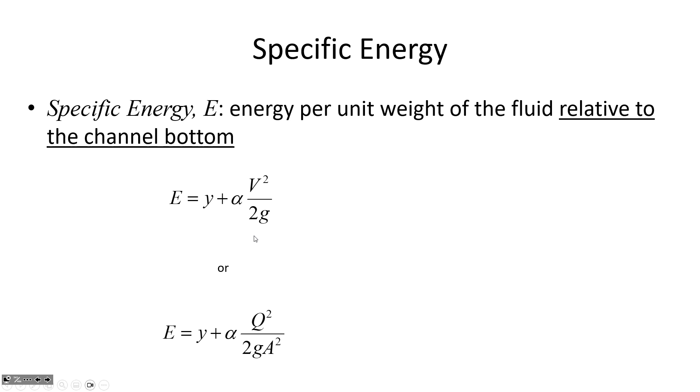But specific energy is just saying, if we measure the water right here, what's its depth and velocity head, and then in the direction of flow, we can compare how much energy is there at one location to another. If conditions are steady and uniform, then all of the head loss that's occurring as the water flows downhill is equal to the changes in elevation. We've talked about that before.

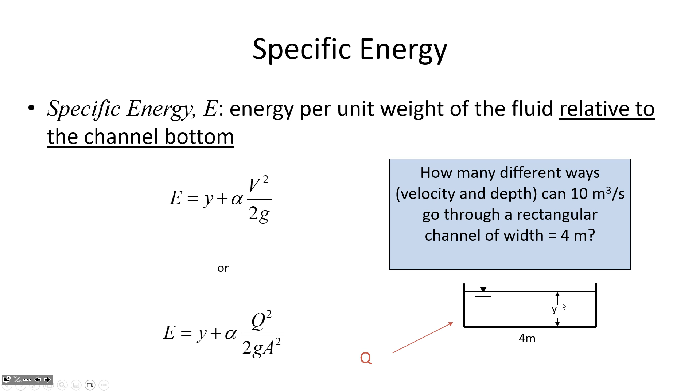How many different ways in terms of velocity and depth could 10 cubic meters per second flow through this channel, which has a bottom width of 4 meters? So there's as many different possible flow depths as there are different possible slopes. We could have, for example, a really steep slope where the velocity is really high. You know, if it's really steep, like water slide steep, then the velocity could potentially be moving at 10 meters per second.

Or if the channel is relatively shallow in slope and it's laid out on flat land, it could be that the water's just ambling along at a very slow 1 meter per second. So it would depend on the slope, but you could have any potential velocity. And remember that all of these different combinations we're going to look at have 10 cubic meters per second.

And if Q equals V times A, then area, cross-sectional area, is the flow rate divided by the velocity. So if the water is moving at a really fast velocity, then it's going to have a relatively shallow depth, because the water wouldn't need to be very deep if it's moving really fast at a high velocity to achieve 10 cubic meters per second. So we're just saying, what are the possible cross-sectional areas?

And then if this channel is 4 meters wide, in order to get a certain area, we would multiply 4 times the depth to get the area, or to get the depth, y, we would have the area divided by 4. So this is just saying, for example, if we had the 10 meter per second velocity, then you'd need a 1 square meter area to get 10 cubic meters per second. So if you just consider the units, 10 meters per second multiplied by 1 square meter is equal to 10 cubic meters per second.

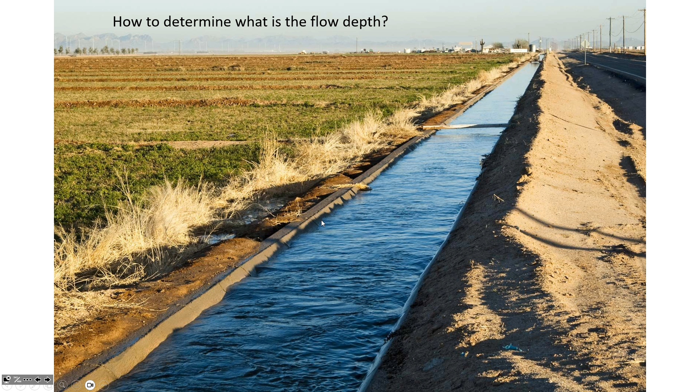And when we disturb the water, like if we put an obstacle in the channel, going back to this irrigation canal, if we just dropped a couple of sacks of cement in this channel when it wasn't flowing quite as deep. I mean, if we dropped the sacks of cement into this channel, probably it would flow over the edge. But if it had half as much flow in it, it would pool initially until it had a certain amount of energy, and then it would flow over the obstacle.

So let's consider it from another perspective. If we made a graph, we could have flow velocity on one axis and flow depth on the other. So, I mean, I guess that's a pretty interesting graph, but it's not the really interesting graph. The really interesting graph is the specific energy diagram. And you're going to have to make some of these in Excel. And they're very useful for problem solving, for diagnosing the flow regime.

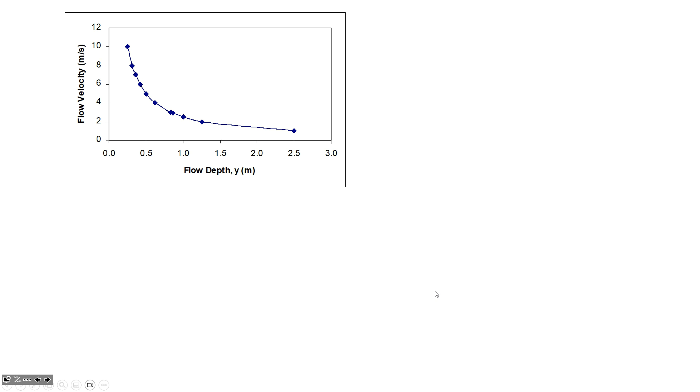Flow regime is a phrase you've heard before. On one of the homework assignments, I think you characterized the flow regime. Do you remember what you calculated? What number was it you calculated to diagnose the flow regime on that assignment? Froude number. Very good. So Froude number is one way to diagnose flow regime. These diagrams are another. So this is the ho-hum, kind of boring diagram.

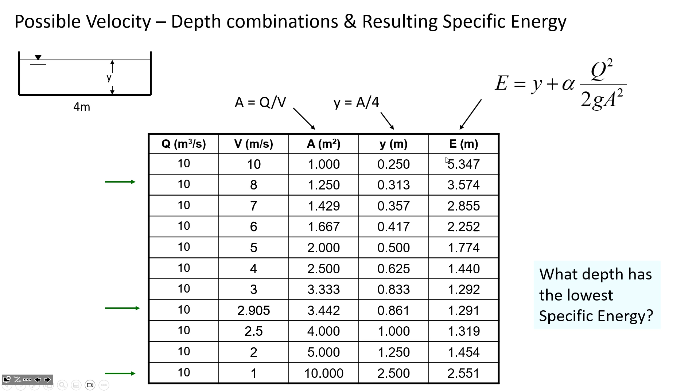But if we graph the specific energy on one axis and flow depth on the other, this is a very, very important figure. And there's a lot of questions we can answer with this figure. It looks simple, but boy, it's powerful what we can do with just graphing these details. So we'll explore over several classes all of the things that we can assess with a figure like this. But all I've done is I've taken the data from the previous slide. So I took the E data and I put that on the x-axis, and I put the depth on the y-axis.

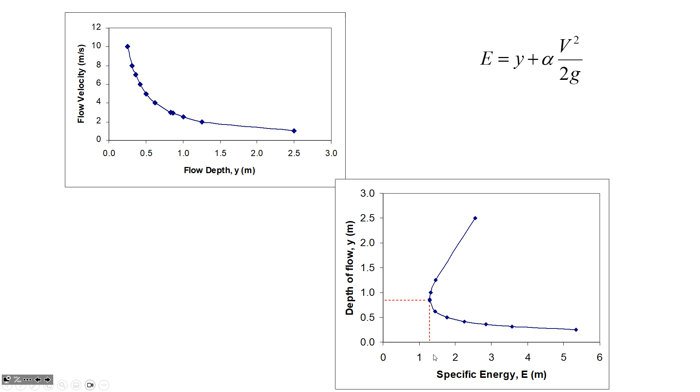So depth on the y-axis, specific energy on the horizontal axis, and then remember there was some depth that corresponds to the minimum specific energy. That's this point right here, that's furthest to the left. It's a really important point, the point of minimum specific energy. So this minimum specific energy point, if we take it over to the left axis, it gives us the critical depth. And if we take it down to the horizontal axis, it identifies the minimum specific energy required to convey this 10 cubic meters per second through a channel that's 4 meters wide. So minimum specific energy and critical depth are the first two things that we can figure out from this figure.

It's important for you to know this. In this class a lot of it is just putting numbers into equations, but there are certain times when you're going to have to really understand what's happening, and this is one of them. I've given exam questions before where I just ask people to tell me things from the figure, and it was really disappointing how few people really understood what's being displayed in this and what it means, because it's really powerful.

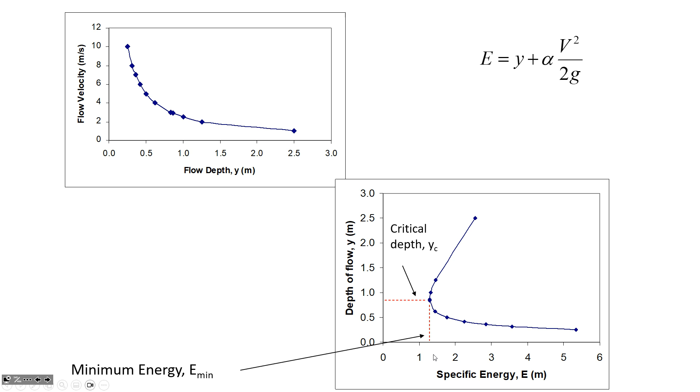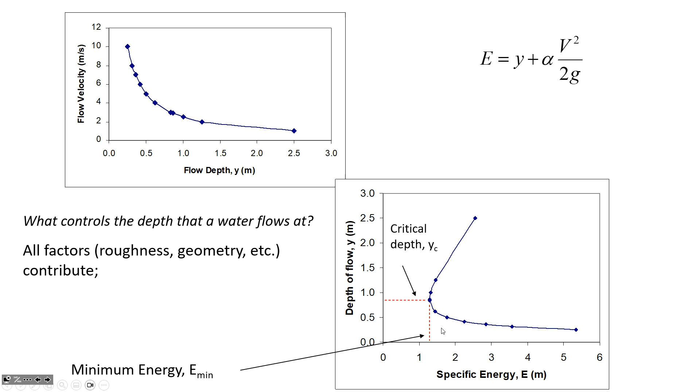So back to the idea of there being lots of different possible slopes, there are a lot of things that govern water's flow depth through a channel. Everything plays a role. The roughness of the material that's been used, the shape of the channel, meaning whether it's trapezoidal or semicircular or rectangular and so on. All of these factors contribute, but for a given cross-section, it's the slope that determines what the flow depth will be. So all these different depths of flow that we see here would correspond to some certain slope.

Now, alternate depths are something that we can diagnose from this figure. So remember, the first thing we can figure out is what's the critical depth. We can also find out from this figure if there are certain depths that seem to have the same amount of specific energy. So for example, when the water depth is 2.5, if we go over here to this figure, there is another depth down here. It looks like a depth of about 0.4 meters that has the same specific energy.

And that is significant when we're dealing with a phenomenon known as hydraulic jumps. And hydraulic jumps are seen in a lot of cases. Maybe one that's really important to us is in the spillway of a dam. There are often hydraulic jumps where water is going from supercritical flow, where it has lots of velocity and a lot of energy. It will jump to subcritical flow, and it goes through a pretty visually dramatic transition, and it'll jump up to an alternate depth that we could predict using a specific energy diagram.

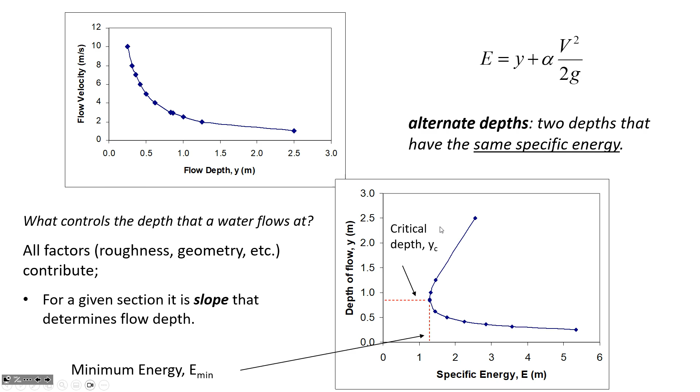So flow regime can be classified using Froude numbers, or you can classify flow regime by comparing a given depth to this diagram. So any flow depth that's less than the critical depth corresponds to supercritical flow conditions. When the flow depth is greater than the critical depth, you've got subcritical flow. So that's what this is saying. When the depth is greater than the critical, then that's subcritical conditions.

Now, maybe you'd be thinking, well, why is it called subcritical if the depth is more than the critical depth? It's because the velocity is moving slowly. If you've got deep water, it's moving slower. If you've got shallow water, it's moving faster. So when the flow depth is small, the velocity is high, and that's what makes it supercritical flow. So this is another way to diagnose the flow regime, is you compare the actual observed flow depth to the critical depth, and then you can figure it out that way.

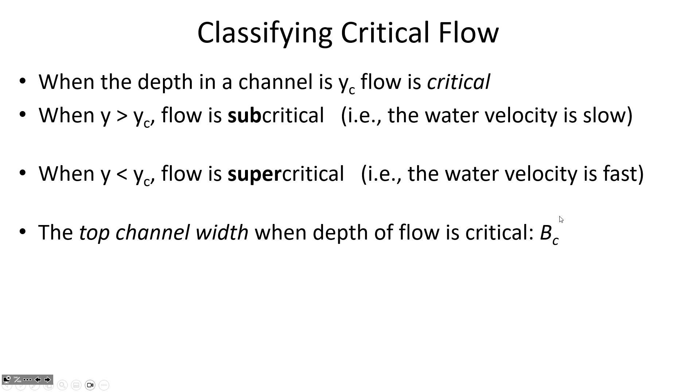Sometimes we want to describe what is the top width of the channel when conditions are critical, so when it's flowing at the critical depth. So B sub C is just if the water is flowing at the critical depth. So if it's rectangular, then B sub C is the same as the bottom width if it's going critical. But when the channel is trapezoidal and the water is flowing at the critical depth, then there is some top width that's corresponding to that, and we would say it's B sub C. So this is showing a rectangular channel. The B for a trapezoidal channel depends on the side slopes and then what the flow depth is.

And the reason why I mentioned this top width issue is that one of the ways to calculate Froude number is with this formula here. So you could calculate it based on the velocity and the hydraulic depth, or you can calculate it based on the flow rate, the top width, and the cross-sectional area. So you could use this formula to solve what is the critical depth. So if the Froude number is equal to 1, you could set this equation equal to 1 and solve for the unknown depth. And that would be how you could find the critical depth, is numerically solving this equation by letting the Froude number equal 1. So we'll do that.

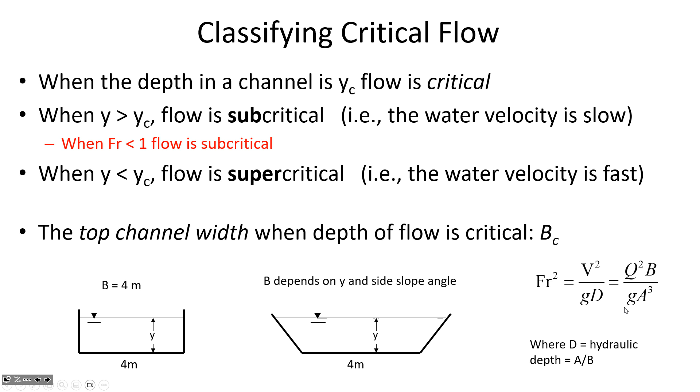We'll work an example where we solve for the critical depth by setting the Froude number equal to 1. When the Froude number is less than 1, it's subcritical flow. Greater than 1 is supercritical. And hydraulic depth, just to refresh your memory, this is something we've talked about before, but it's the area divided by the top width. So hydraulic depth tells you for a non-rectangular channel what the equivalent depth would be if the channel was rectangular, given the cross-sectional area that it has. So it's a parameter that you'd need to know in order to calculate the Froude number in terms of velocity.

So the hydraulic depth of a rectangular channel is just its actual flow depth. So hydraulic depth is equal to Y if it's a rectangular channel. It's not equal to its actual flow depth in the case of a trapezoidal channel, though.

Some channels are diagnosed as being very wide. And what we mean by that is if it's more than 20 times wider than it is deep, then the significance of that is if a channel is really, really wide, then it doesn't matter what the side looks like. It doesn't matter if it's rectangular or trapezoidal, because if you let this be a very wide channel, then the hydraulic depth and the actual flow depth are effectively the same thing, because the cross-sectional area of the side components of the channel is insignificant. So we say very wide is when the width is more than 20 times greater than the depth. Then we could just assume that the hydraulic depth is equal to its flow depth, regardless of the shape of the channel.

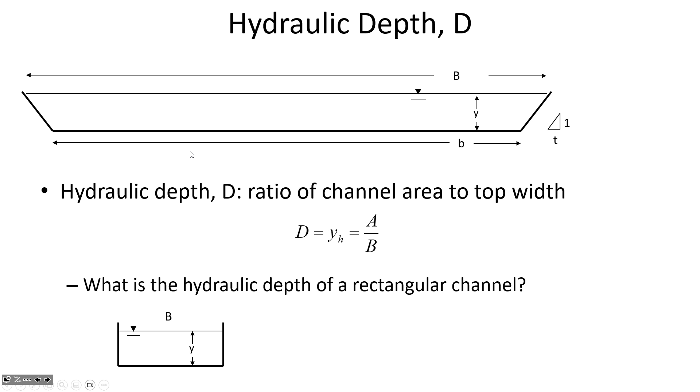The hydraulic depth of a rectangular channel is just the flow depth Y. All right, so let's look at an example. First, solving using Excel, and then solving the Froude number.

Just as a simple first case, let's consider a rectangular channel. We will do trapezoidal channels later on, but just to get a feel for things, let's start up Excel and try and make a specific energy diagram and find out when the flow depth is 0.25, whether we've got supercritical or subcritical flow, and then when the depth is 1.25, whether we've got supercritical or subcritical flow. So let me show you how to make a specific energy diagram, because you will need to do it for the homework eventually.

All right, so we've got a bottom width in this channel of 4 meters. And then we're going to have a variety of different flow rates, a variety of different depths, a lot of different cross-sectional areas and velocities. And then we will calculate for each of these different depths what is the corresponding specific energy.

Now you never know at the beginning how many different rows to have in a figure like this. To have a nice smooth curve, you can't just have like 3 rows. You'd get a triangle from that, not a curve. So like 10 to 20 rows is usually sufficient to get a good quality curve. So all of them are going to have the same 10 cubic meters per second flow rate. So let me just drag this down.

But then we're going to look at lots of different flow depths. And we don't know from the beginning what should be the flow depth that we start with. So it's a little bit of an iterative process. Let's just see if we start at 0.2 and then 0.4, 0.6. So we'll do it in increments of 0.2 and see what that gets us.

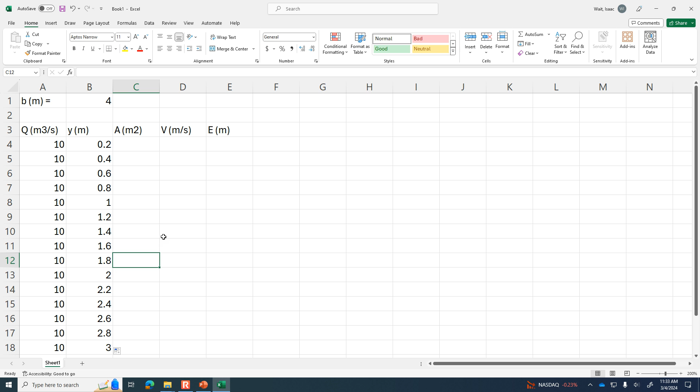All right, so the cross-sectional area is going to be the depth, and I'm going to anchor the width reference because it's always 4 meters wide regardless of which row I'm on, multiplied by the depth. So depth times the bottom width of the channel. So we've got a lot of different cross-sectional areas. And remember that the velocity is Q divided by the area. So Q divided by the area gives me the velocity.

And specific energy is the depth of flow plus, remember, velocity head can be expressed as V squared divided by 2g or Q squared divided by 2g A squared. And I'm going to do it that way just to get in the habit. So I'm going to say E is the depth plus Q squared divided by 2g A squared. Okay, so that's the formula I'm using here in column E. So it's the depth plus Q squared divided by 2 times g, so 9.81, times A squared.

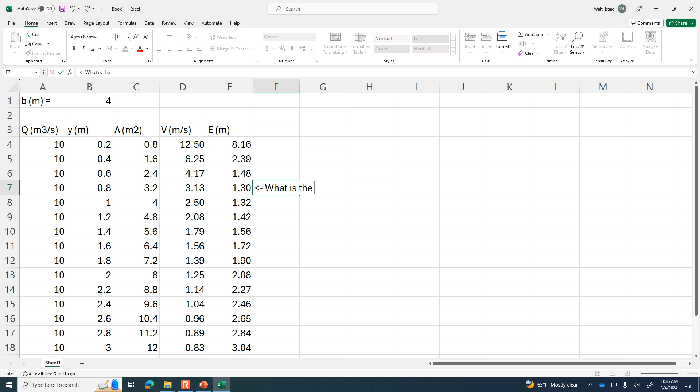All right, so now what does it look like is our minimum point so far? What is the lowest specific energy here? It looks like 1.3 is the minimum so far, but that doesn't mean that that is the critical depth automatically. So let's just say, what is the value of y that yields the smallest E value? Okay, so what if I said 0.81? Well, it's hard to see. Maybe this one we do need to see a few extra digits on. 0.82. All right, got a little bit smaller. 0.83. Got a little bit smaller.

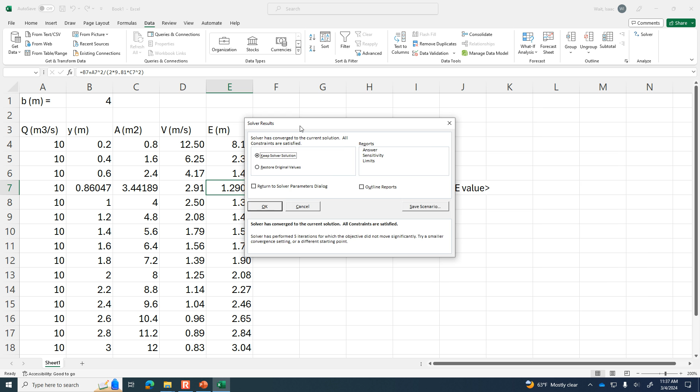Let me go and try under Data, Solver. I want this, so cell E7, to be minimized by changing the depth. So it's going to play around with lots of different depths, and it's always going to remember what is the E value associated with a given depth, and it's going to stop changing Y when it finds the smallest possible E value. Okay, so I'm going to click Solve, and really quickly it'll play around with it, and it'll find 0.86047. Okay, so I want to keep that value, so I'm going to say OK.

So now I'm going to change this. I'm going to say the critical depth is 0.860 meters.

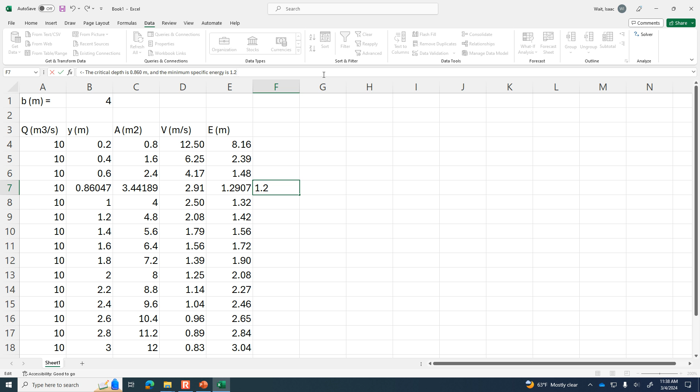And the minimum specific energy is 1.2907 meters. All right. So far, so good. So let's make a graph just to show the specific energy diagram. I'm not going to bother with the diagram of depth versus velocity. That curve doesn't really tell us anything, but the specific energy diagram does.

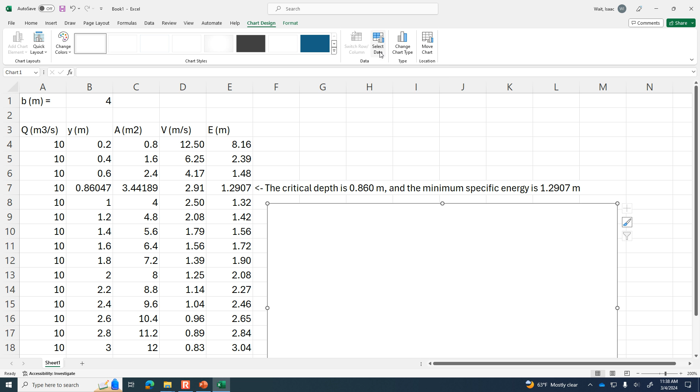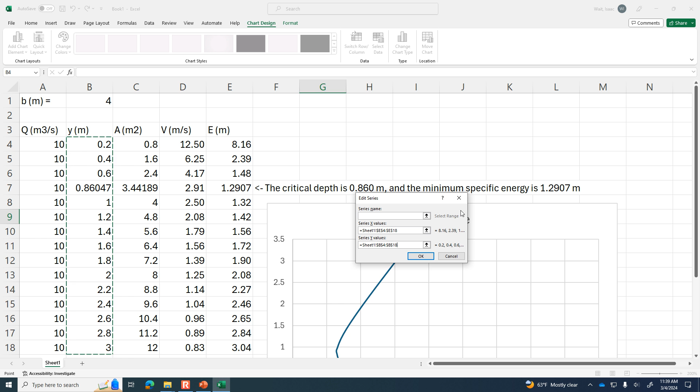And so here, insert, and then I'm going to make an XY scatter plot where I smooth the lines, and I don't necessarily need to see the data points. So scatter with smooth lines. And so I'm going to select data and choose for the first series, X values ought to be specific energy. And then the Y values ought to be the depth. Okay. Let's see what we've got so far.

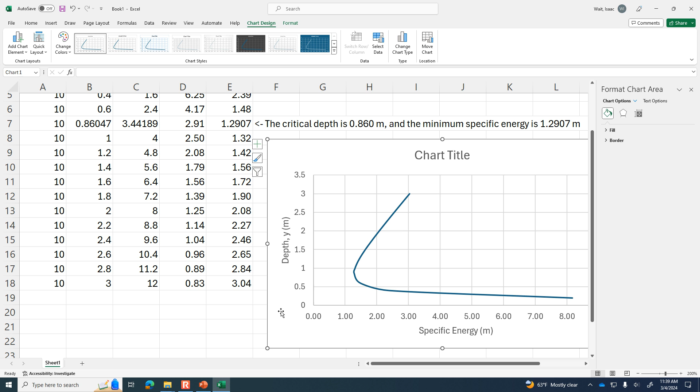Now, zooming out as far as we have, where on the x-axis it's going all the way to 8, that means that we don't get to see this part of the graph in as much detail. So it may be worthwhile for me to change the scale here. First of all, what I want to do is add axis titles. So let's add axis titles and clarify that on the horizontal axis, this is specific energy in terms of meters, and then on the vertical axis, this is depth, which we assign the variable y, and it has units of meters. Okay, and this is a specific energy diagram.

And this specific energy diagram only applies to the flow conditions that we've described here of a 4-meter wide channel, 10 cubic meters per second. Any other channel width, any other flow rate is going to give a different diagram. But what I was saying earlier about zooming in, let me right-click here on the horizontal axis, and if I format the axis so that instead of going all the way to 8, what if we just focus in from 0 to 3? The advantage of doing that is it gives us a little bit more insight in this part of the graph.

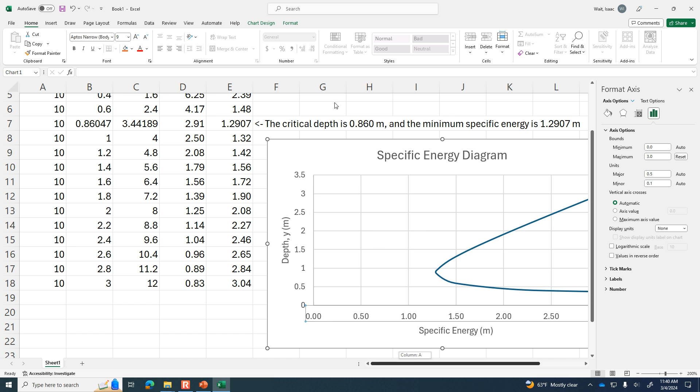So how many data points do we have there, by the way? If I have it show the points, that's a fair number. We could put in a few more data points and that would make it a bit smoother. But this is a good specific energy diagram. Here's our critical depth. We could calculate alternate depths if we needed to. And here's what I want to reinforce to you as well, is that there's a certain part of this region that is supercritical flow and a certain part of this region which is subcritical flow.

So I'm going to divide the graph up, I'm going to do this line here just to emphasize that, let me make it a dashed line. Okay, so above the line is subcritical conditions and below the line is supercritical conditions. And so flow is subcritical above that line, and below it the flow is supercritical. Okay.

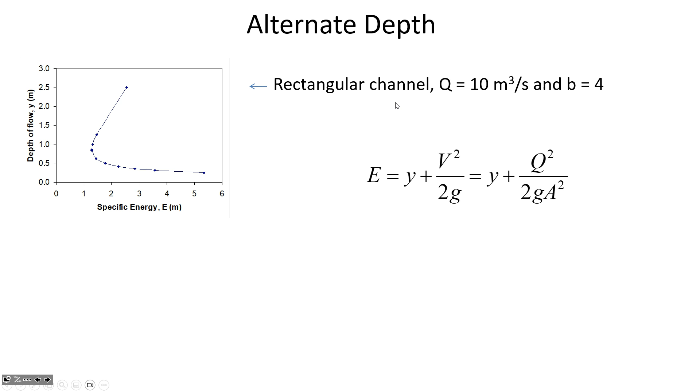So if we were designing this channel specifically, and we told them to build it to 0.8 or almost 0.9 in depth, would we rather them accidentally build it taller so that way it's in subcritical flow? Most of the time channels are built, the flow is subcritical, and that's because the slope that the channel is built on is usually relatively flat. So as a hydraulic designer, you don't usually have control over the slope. The topography is in charge of that variable.

There may be rare cases where you can decide where the channel is going to go and you could pick a route that forces subcritical or supercritical conditions. But they usually only have supercritical flow on purpose in a few select locations. Because if the water has that much velocity, chances are it could do some damage. It could do like scour of the channel. So usually they're pretty cautious about having the water flow under supercritical conditions.

And then downstream of the supercritical flow, they'll put like big blocks of concrete and they'll reinforce the channel. They'll have some place for it to intentionally go through a hydraulic jump so that it can go out of supercritical flow and back into subcritical flow conditions.

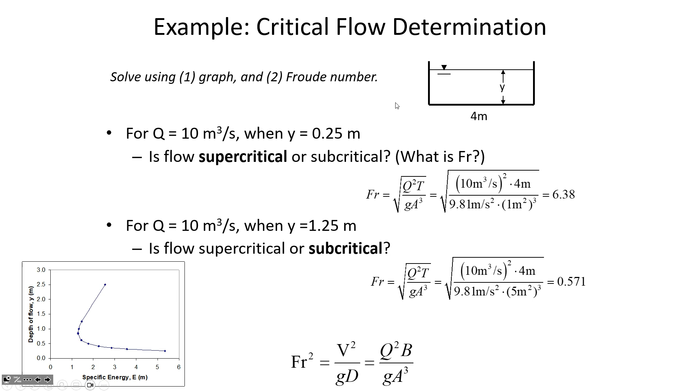So I forget the name of that big spillway that we looked at, the whole hillside collapsing. Yeah. So when it comes out, is it in supercritical and then they slow it down? The Oroville Dam? Yeah, let's look at those pictures. I don't remember which lecture. First one. Very beginning. Feels like a lifetime ago. Here it is.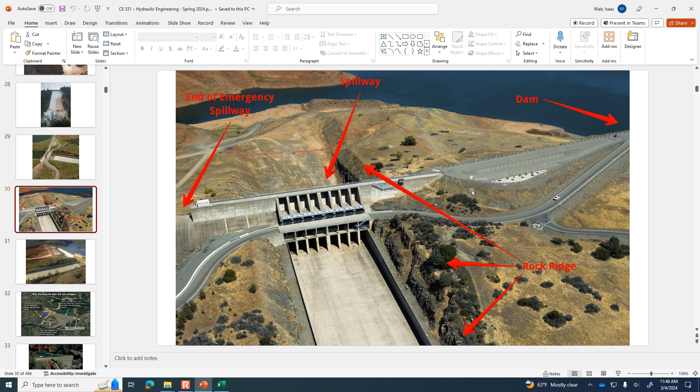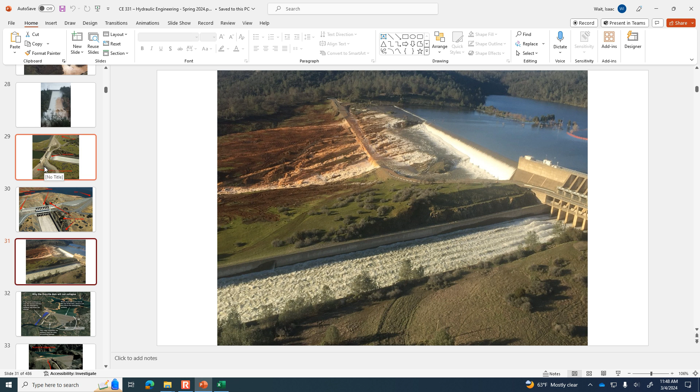It's not that they're intentionally trying to make it supercritical through that spillway. It's just that I think that's the tallest dam in the United States, and so by virtue of the size of the dam, it's supercritical over that. But remember, the water only flows over that spillway once every 25, once every 50 years. Most of the time, the water's going through their penstock, which is like these big pipes that run through the hydroelectric plant.

But yeah, that's definitely supercritical flow, and that's part of the reason why it caused as much damage as it did. The concrete had some flaws in it, and when water is moving at really high velocities, it's going to find whatever weakness, whatever flaw in the concrete, and chip away at it. There's a lot more energy for it to do scour.

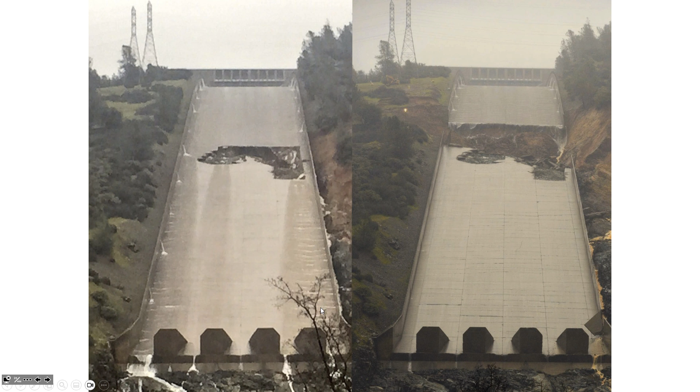But there are these big blocks down at the bottom. Let's see, do we get a good picture of those? Yeah, this is meant to slow the water down a little bit, but even when it gets into the channel downstream, it's still going to have a lot of scour energy, and so even if the spillway wasn't broken, if they have to use the spillway, there's going to be damage to the river downstream because there's so much energy in the water.

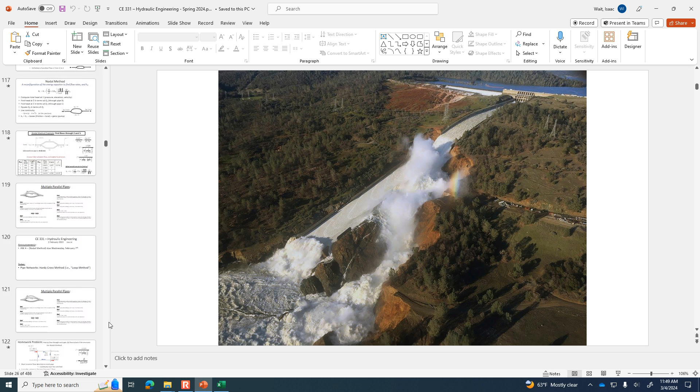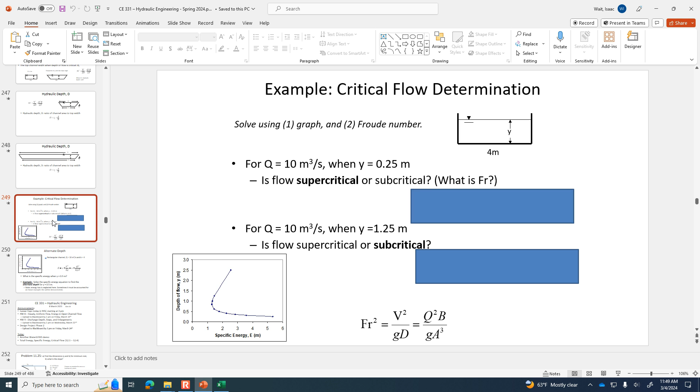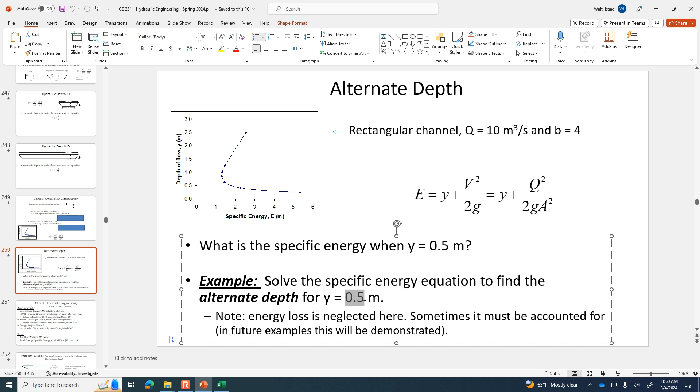So here's what we'll do when we get together on Wednesday. We're going to use a specific energy diagram, the same one that I just made. We'll come back to it and we will ask what is the alternate depth for when the water is flowing at 0.5 meters. So we'll play around with this. I'm going to save it so that I can come back to it again. If you've got yours, save it so you can come back to it again. We'll just revisit this example on Wednesday.